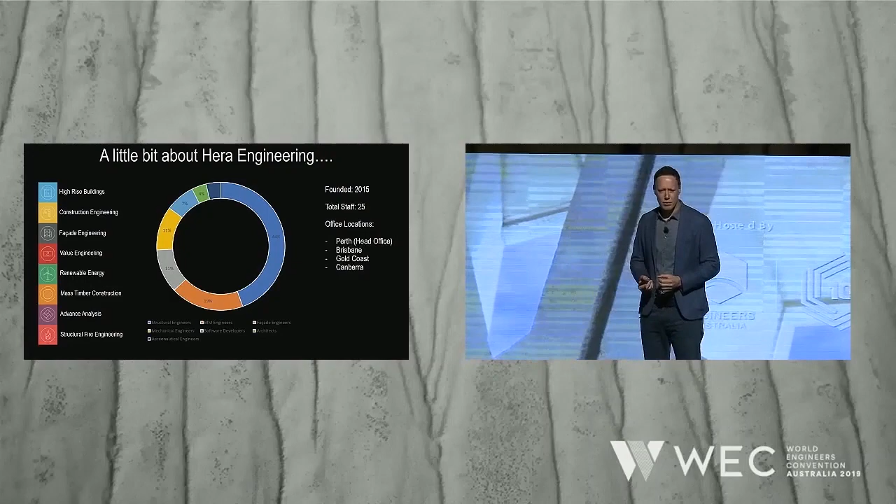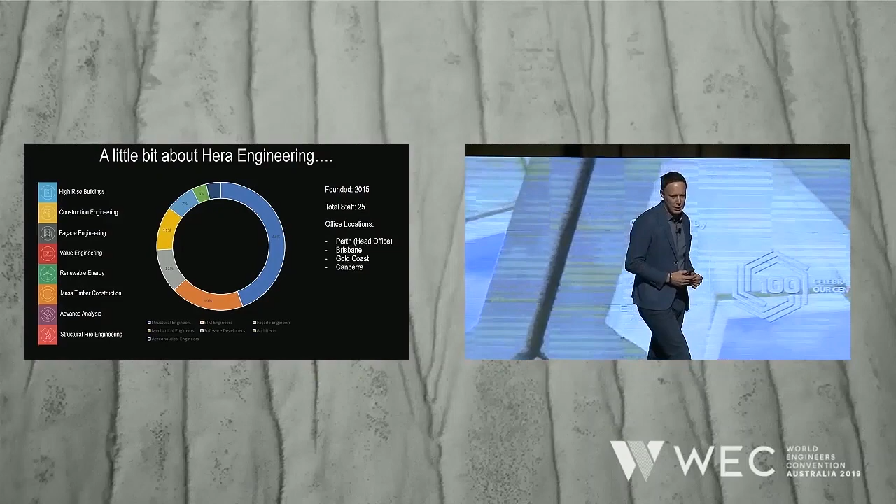Just a bit about us, for those who don't know, I'm a structural engineer and I run a company called Hera Engineering. We're based in Western Australia, around 25 staff. We do structural design, facade, and a lot of temporary work. So we work very closely with builders. High-rise is what we mostly specialize in. Some of our projects across Australia include towers in Perth, Canberra, and Gold Coast.

Now, what I want to talk about today is the challenge of tomorrow. We're going to be building cities and the population will grow. I like this sentence where they say: 19th century, century of empires; 20th century, century of national states; 21st century, century of cities. I think that's very true because our cities are growing in population. Every time I come back to Melbourne, I see more buildings.

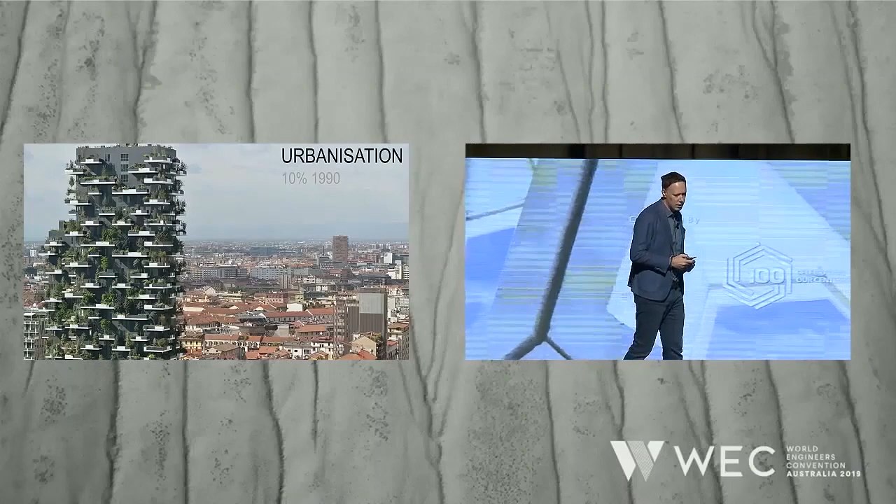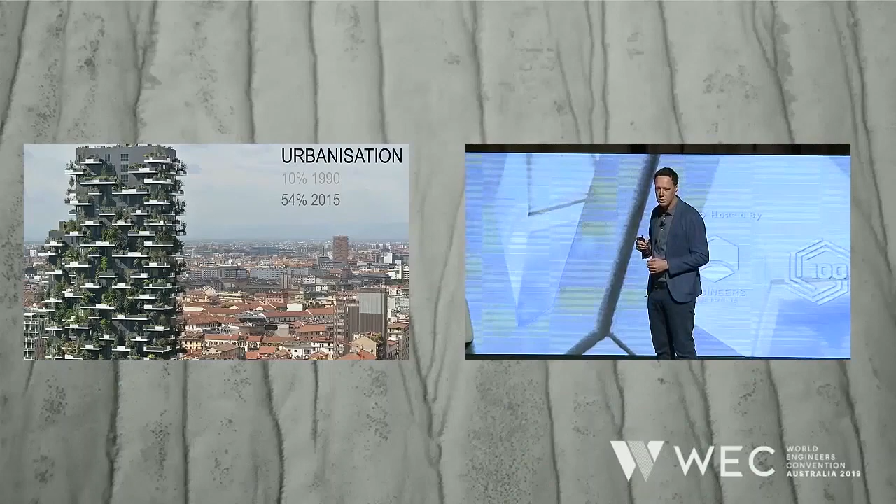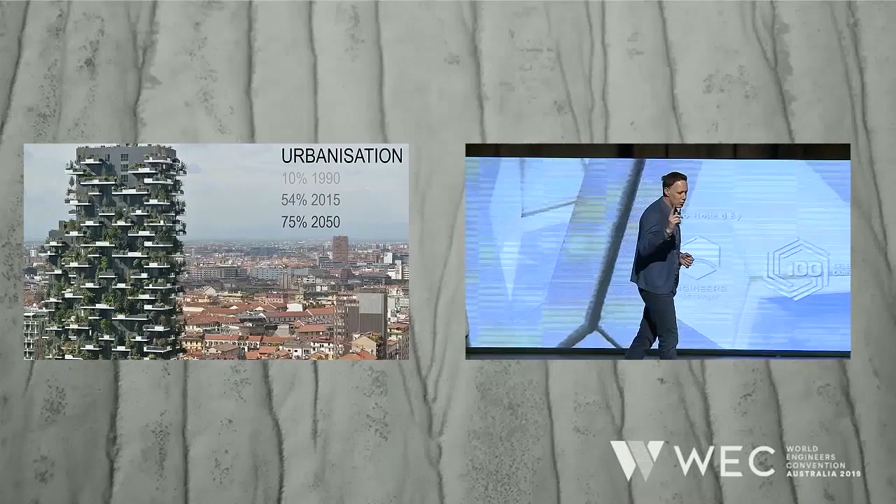It's interesting data on urbanization: 10% of the world population was living in cities in 1990 - I was only 10 at the time. That grew to 54% in 2015, more than half the world living in cities now. I grew up in a small village, so I only moved to a city in my 20s. By 2050, 75% of the world population will be in cities. That's the prediction, and I think it's true.

So we're facing a big challenge here. We have to find space in cities for 3 billion people in the next 30 years. So we've got a big world housing challenge - that's 40% of the world. 1 in 3 people that live in cities live in slums.

So the challenges for us as designers and engineers building cities: we have to bridge the gap of urban inequality, and address rapid urbanization - our cities have to have the right infrastructure and the right buildings to accommodate all these people coming to live in cities.

But to me, the biggest one is climate change. Our cities will be flooded with concrete, steel, and brickwork. If we keep building the way we are, we're just going to keep driving climate change up. 0.5% of the Earth's surface is urbanized, and 80% of the global economy output comes from cities. That's huge data showing that all our strength, our economy, our industry - everything is in cities.

So if we're going to keep building, we have to build sustainably. There's a big challenge out there because we're building mostly with 3 materials: brick, steel, and concrete. There's a 4th material out there, wood, and I'm a big supporter of wood. Wood is a material that sequesters carbon from the atmosphere. However, I don't think we can build houses and apartments for 3 billion people in wood, unfortunately. So we have to use these 3 materials wisely.

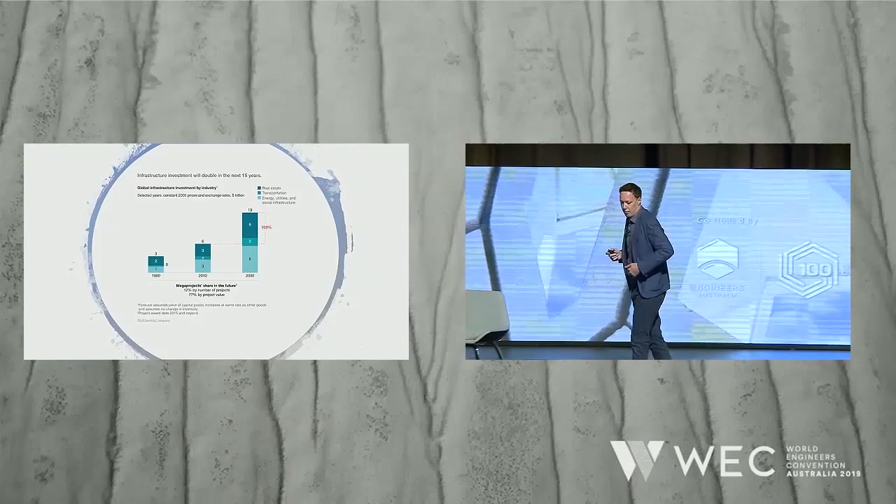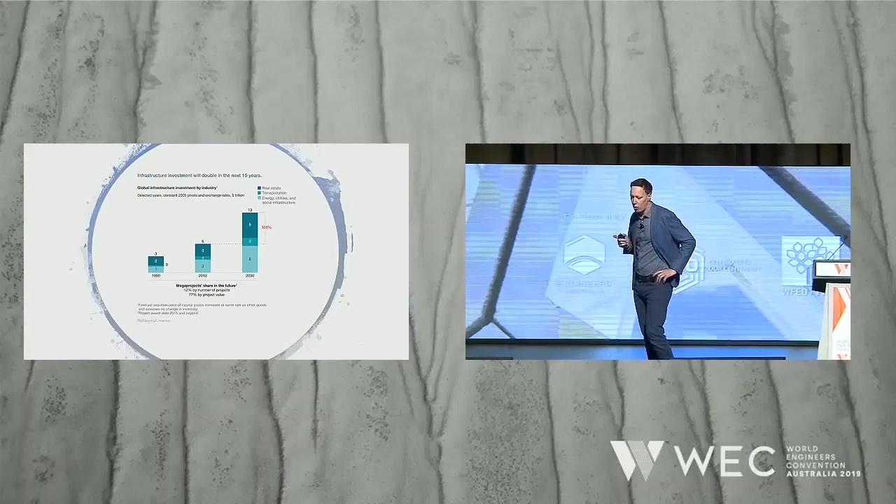This is research I was reading from McKinsey & Company, and I found it quite interesting because it shows that global infrastructure investment will double in the next 15 years. We're going to spend $13 trillion on oil and gas, mining, and bigger infrastructure projects.

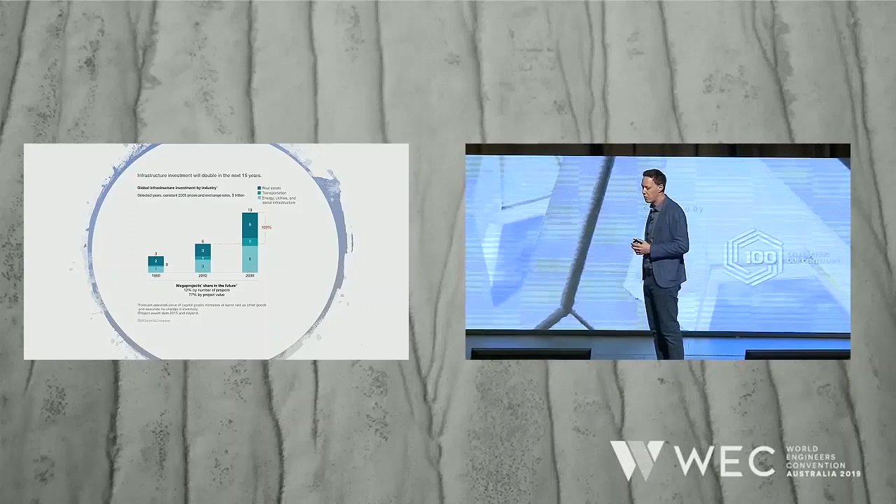Melbourne and Sydney are just flooded with infrastructure projects, which is great, so we're all going to be very busy designing and constructing. However, there is an issue with that.

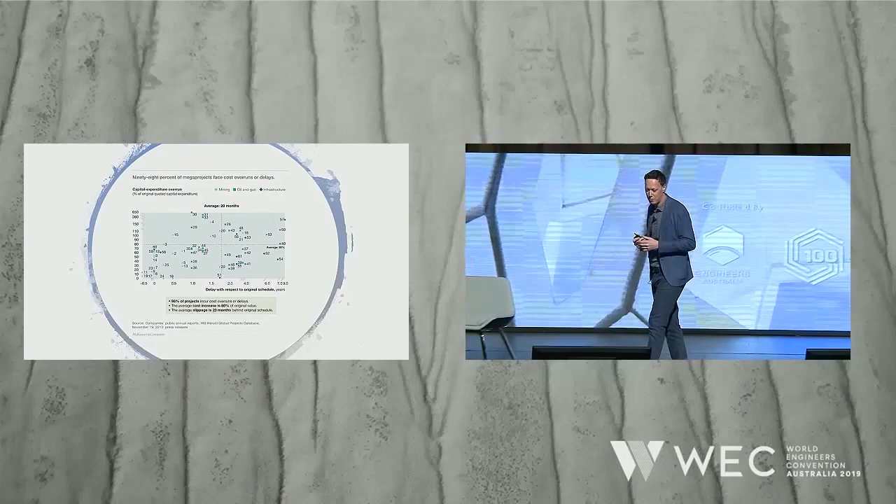98% of these projects are over budget and they are late. And the numbers are quite funny - they are over budget by 80% and they're late by about 20 months.

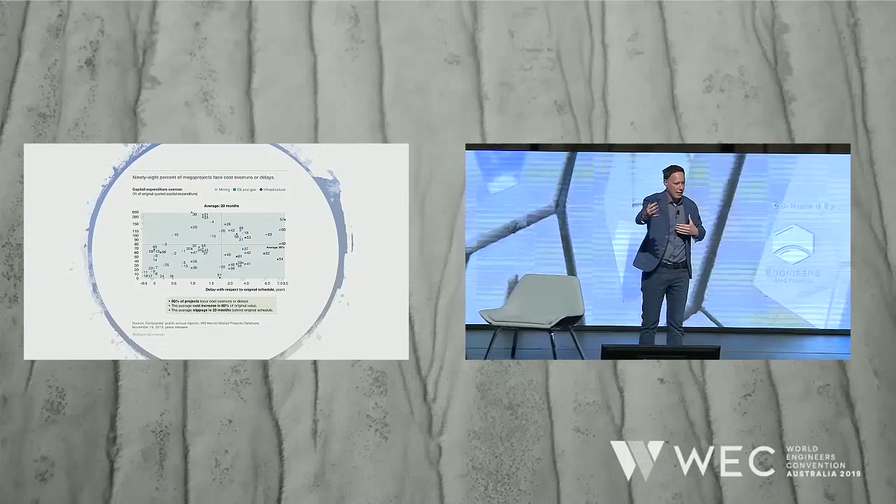So it's incredible, because a project being late and over budget means it's going to be even less sustainable, because you're going to keep building, you're going to keep going with the job.

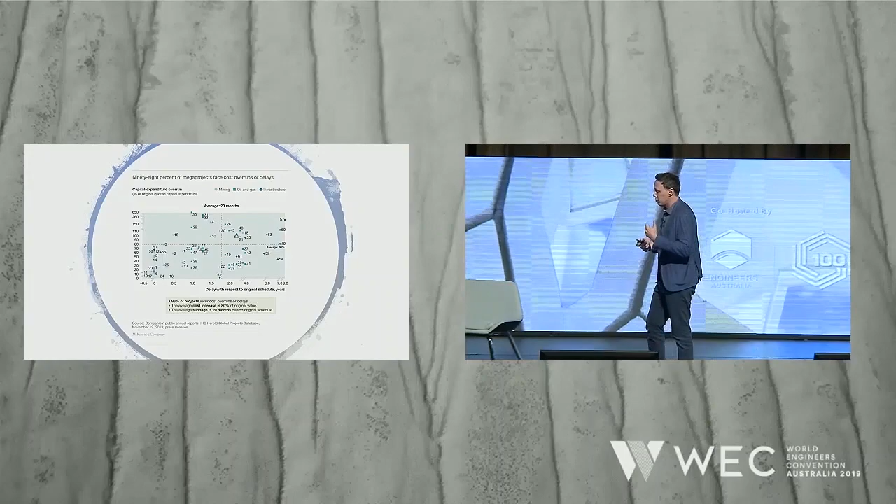So the research goes on to ask why that is. And they look at productivity and see there's a big gap between productivity in manufacturing and in construction. Construction has been flat, and actually got worse in the last few years.

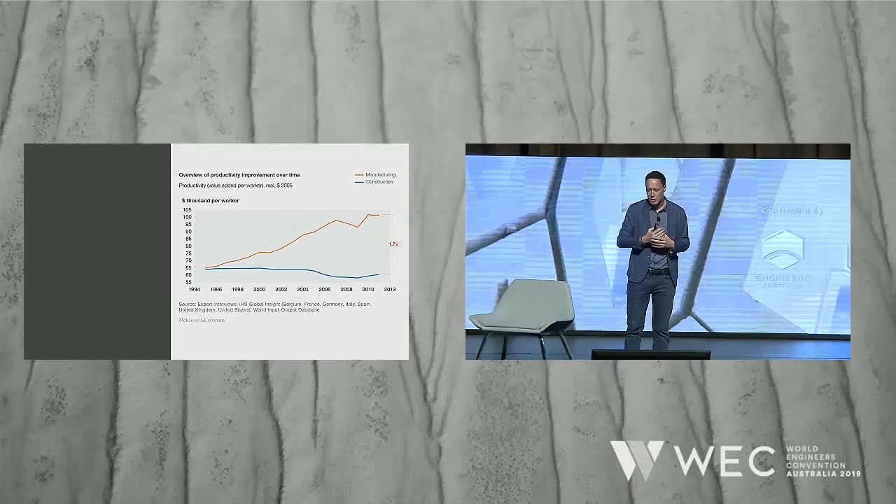Whereas the manufacturing industry went up - there's a 1.7x difference - and it's because the manufacturing industry is fully automated, so there is less human touch put into it.

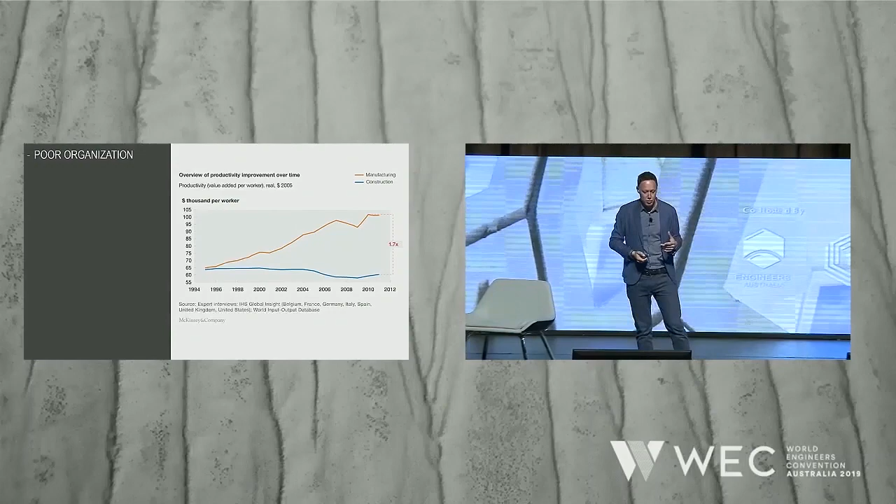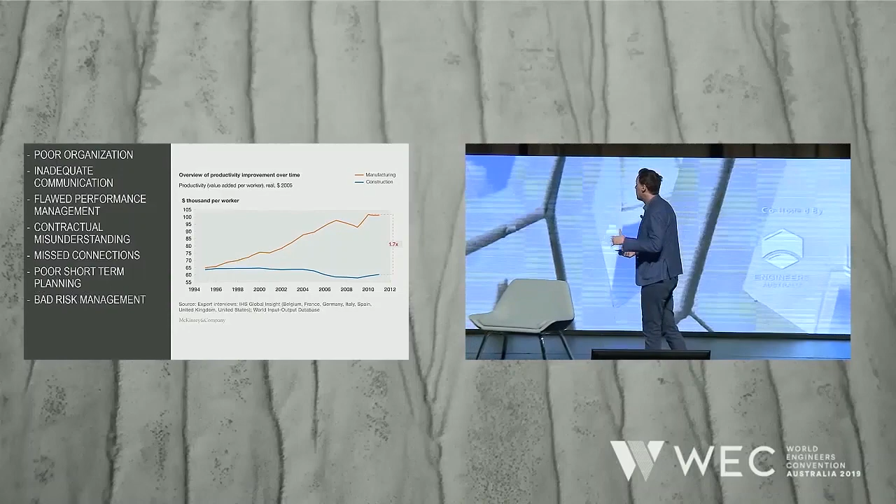And so when there's human involvement, there are a lot of problems that could arise: poor organization, inadequate communication, flawed performance management, contract misunderstanding and misconnection, poor short-term planning, bad risk management, limited telemetry, and you can keep going with this list.

So it's all on us to be able to communicate better and to try to work with our clients and the supply chain in a different way.

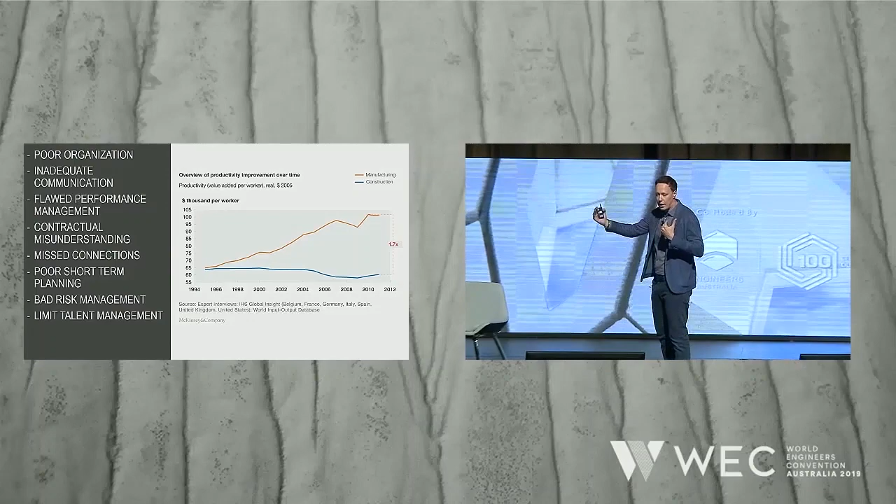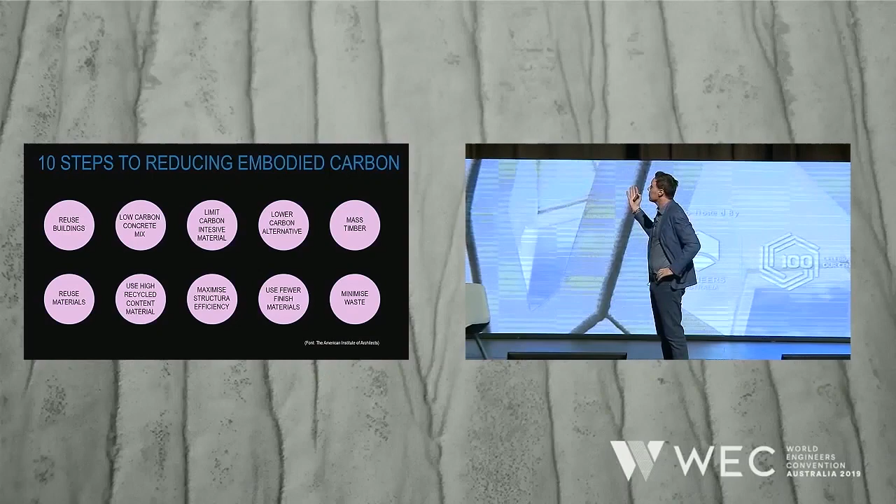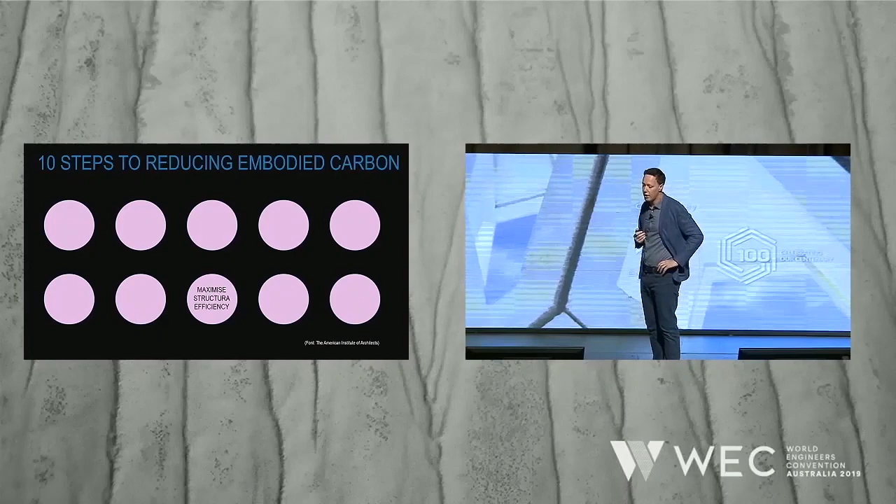This is from the American Institute of Architects. They give us steps to try to produce buildings with less embodied energy. And for me, what I can really talk about is maximizing structural efficiency.

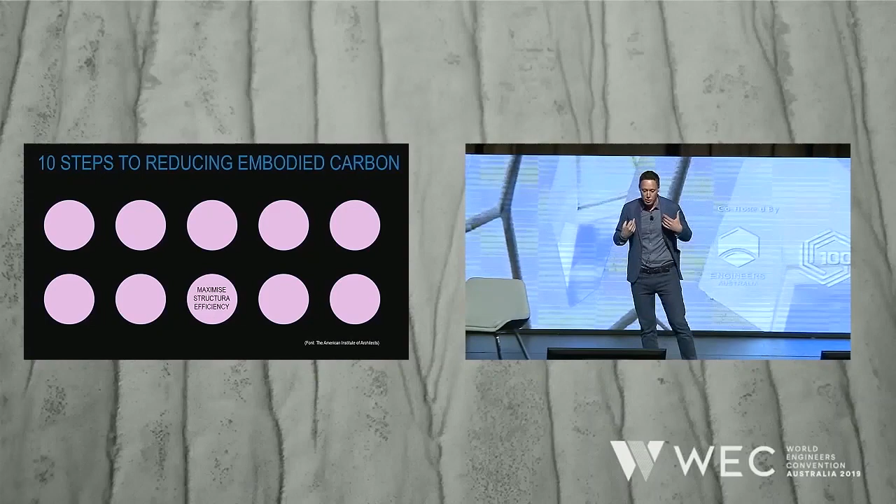This is a common goal that we need to achieve. So as a structural engineer, I have to achieve the maximum structural efficiency that we can to reduce material use in projects.

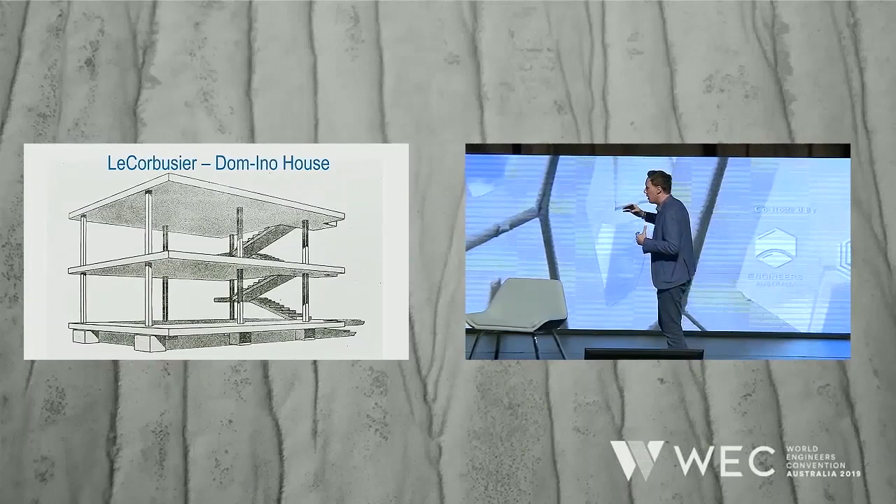So Le Corbusier, in 1914, came up with the concept of the Domino house - this is 100 years ago. The Domino house was thought of after the war, where we had to reconstruct our cities in Europe, to create something that is modular. This was his view: to construct a new home for all the people that lost their house after the war. So it was going to be a modular system - reinforced concrete, 6 columns, 2 slabs, stairs - and then you clad it, and then you fit it out as you want.

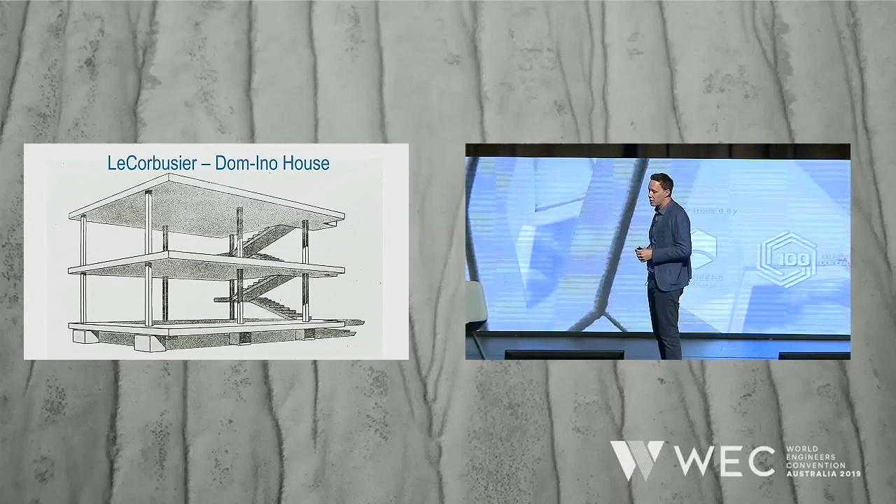And I think this is the basis of a lot of the concepts we're still speaking about today: modularization, standardization, trying to achieve repetition in our construction.

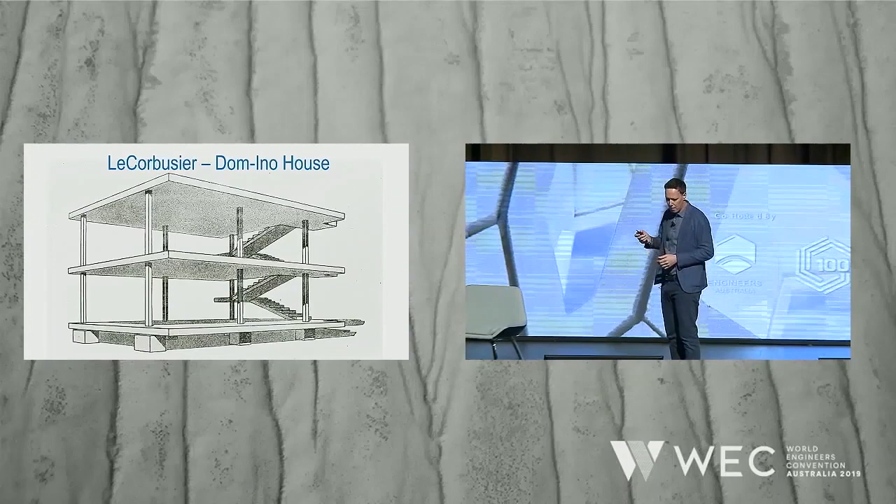And how this project came about is the builder came to see us, and he wanted to save cost on the job because the job was over budget, and he wanted to try to find a different way to do it.

So it was already advanced in the design. There was already a design done, which was a fine design, there was no problem with that. The problem was there were a lot of subcontractors and suppliers, different construction methodology. It was quite intense to build.

So the idea that we had was to remove all the subcontractors from the majority of the concrete, the precast, the AFS, the post-tension, and just stick to structural steel throughout, including the core, columns, slabs, everything. The biggest innovation on this project was it was already conceived with top-down construction, and that was what we left on the job, and we just improved the use of the steel column.

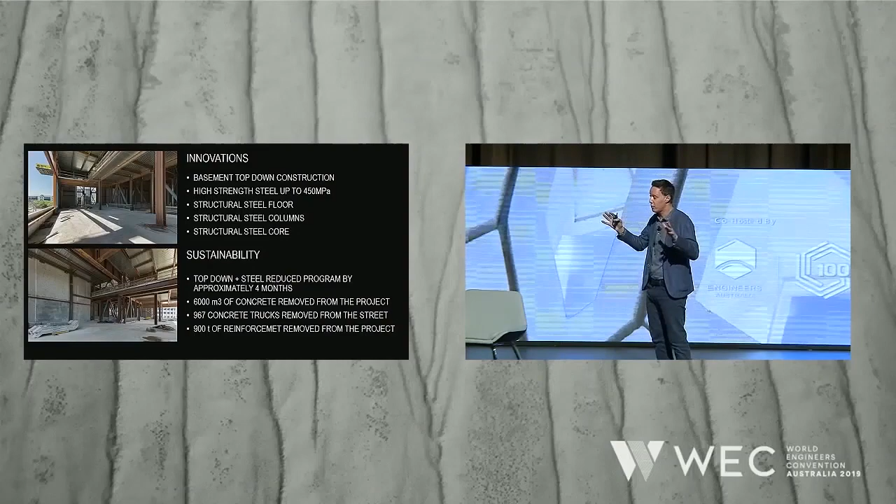We use high-strength steel to reduce the size of the column and reduce the amount of steel on the project. All the floors for both the hotel and the office were changed to steel. All steel column, steel core, which was the biggest innovation. Normally lift cores are built all in concrete, whereas in this project we use structural steel. You can see all the bracing over there.

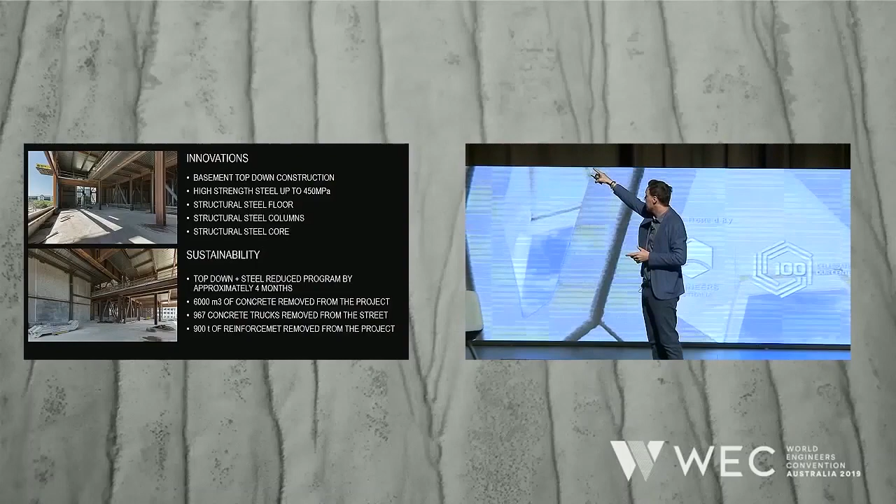So that was, I guess, one of the first times this was done in Australia. It's very common in Europe, but people were very skeptical at the time about it.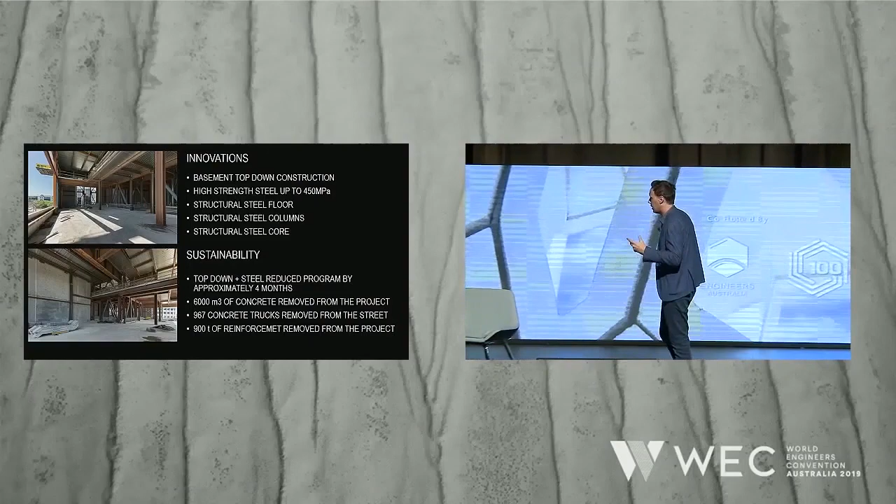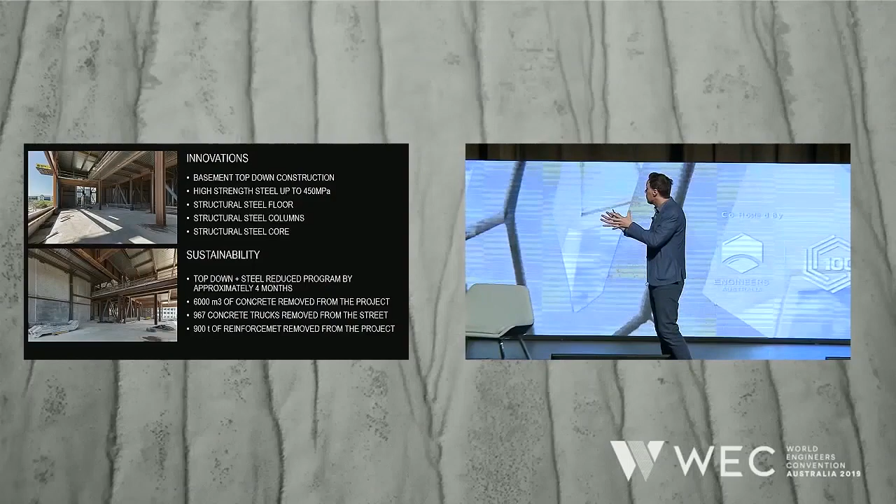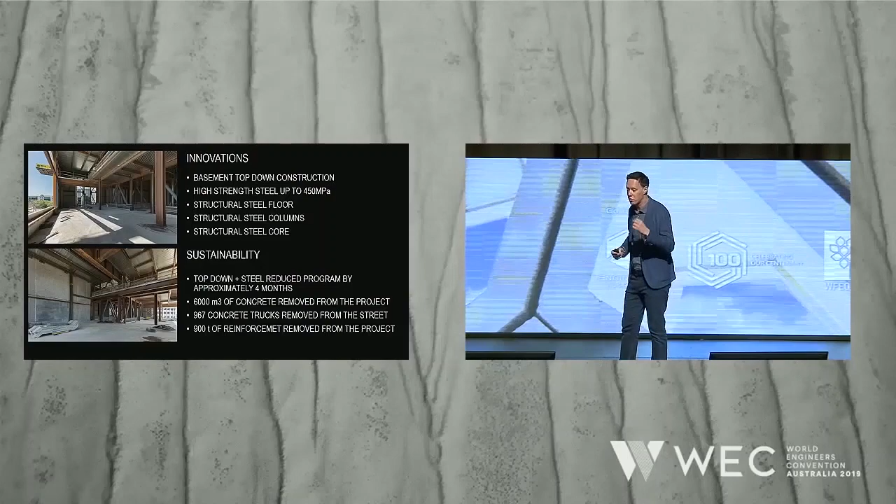Now the sustainability of the project - because we're talking about steel, it's still a material that has embodied energy, but it depends how much you use it and how you use it. So here, by using structural steel, we removed around 6,000 cubic meters of concrete from the project, and almost 1,000 concrete trucks were removed from the street because the slab became very thin compared to how big they were before. So yes, we have to put a steel beam on it, but there has still been an improvement on the embodied energy of the building.

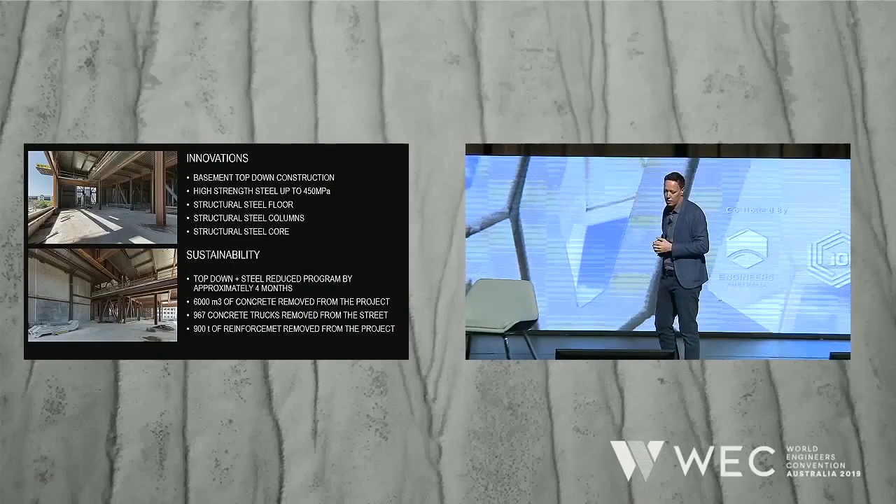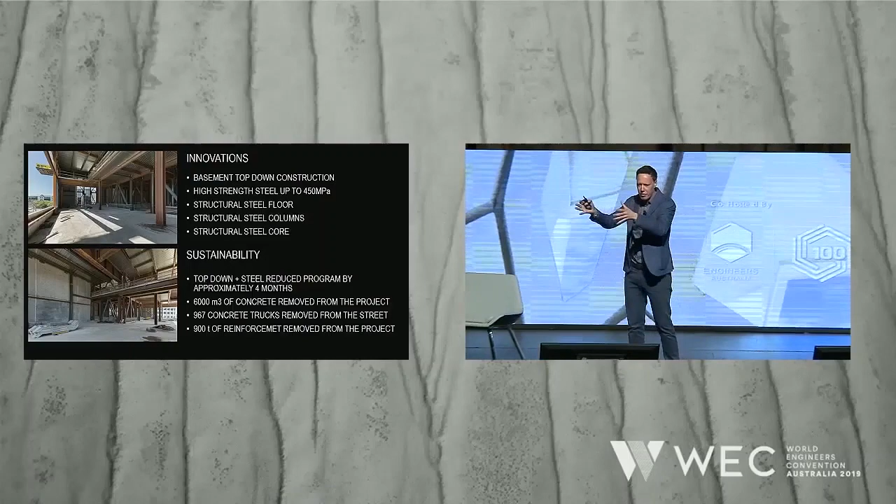And we have removed 900 tons of reinforcement from the job. This is all material that can be used in another development, and you get it for free, because you optimize the design of this building.

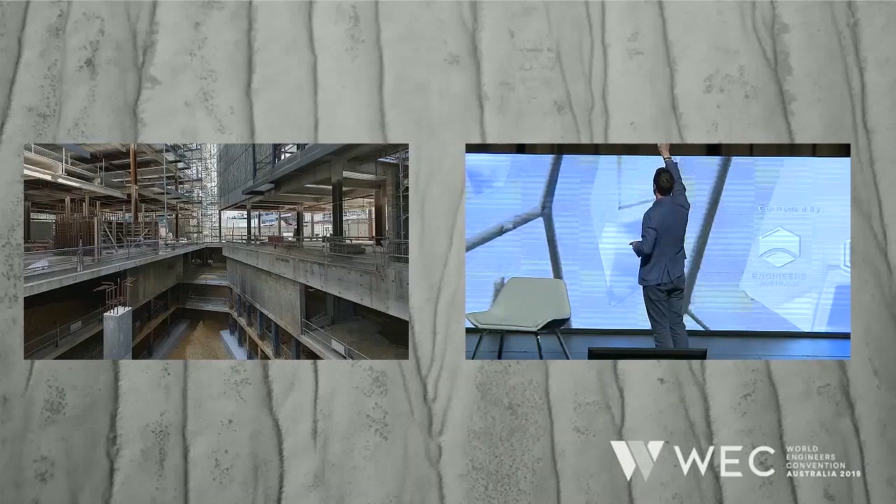Some of the other photos, you can see all the excavation, all the top-down construction, so it was built up and down at the same time. That's all the steel plunge columns going in, and then you can see all the structural steel on the project here. In another slide, you can see all the main core fully braced up.

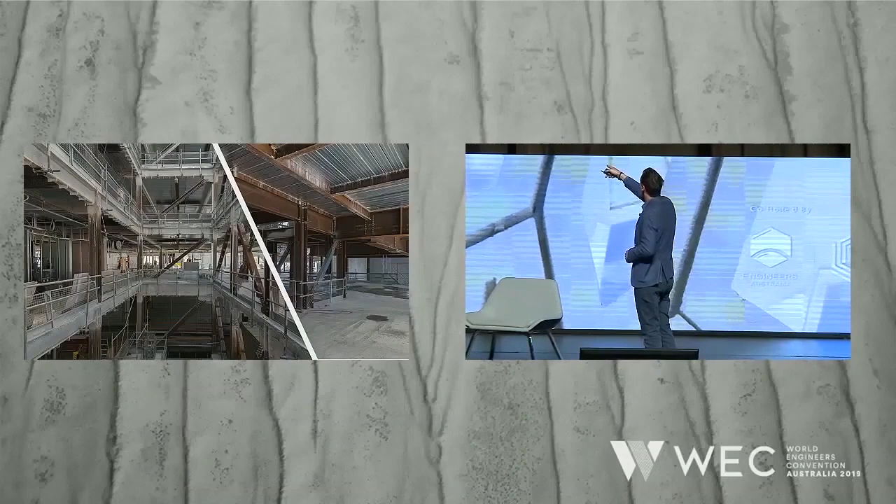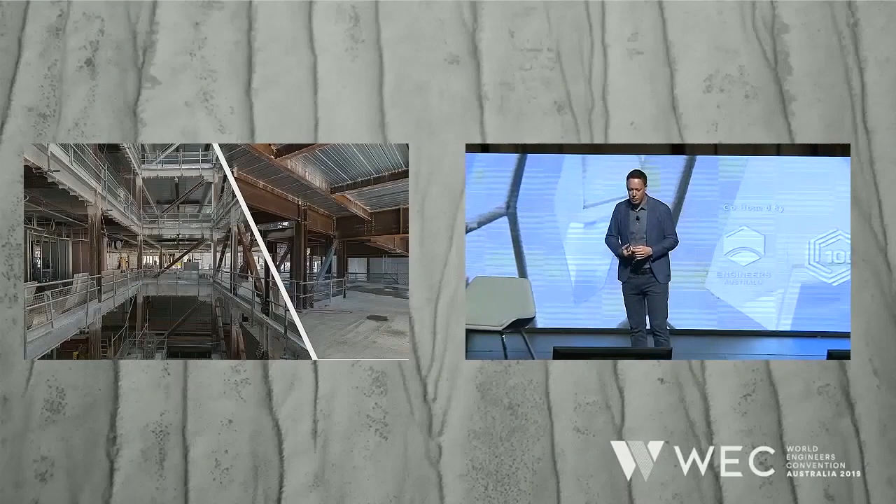So again, it was pretty strange to see - no one had seen it done in Western Australia before. So obviously there was a lot of skepticism out there, but it works - it's done everywhere else in the world. That's the hotel component during construction while the facade was going up.

We came to the project during the tender phase when there was a need to save cost on the project. So our value engineering approach was about, okay, we need to make it quicker to build, and we need to reduce material on it.

So we just started to relook at how the building was behaving, how it was performing, because in high rise, what matters is how much the building is moving at the top. So provided that you can get the building to move the right amount, that's all you want. So we removed a lot of the shear walls, and we introduced a big steel mega truss at the top, just to stop that movement. And that made the project work.

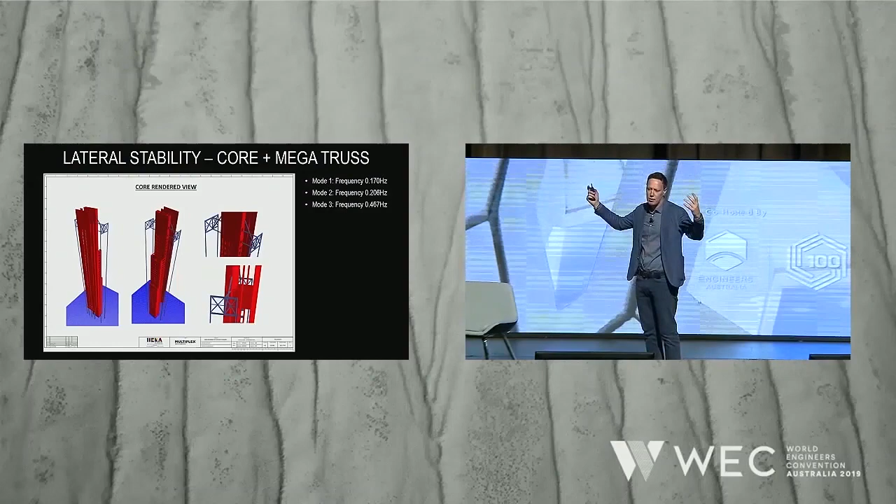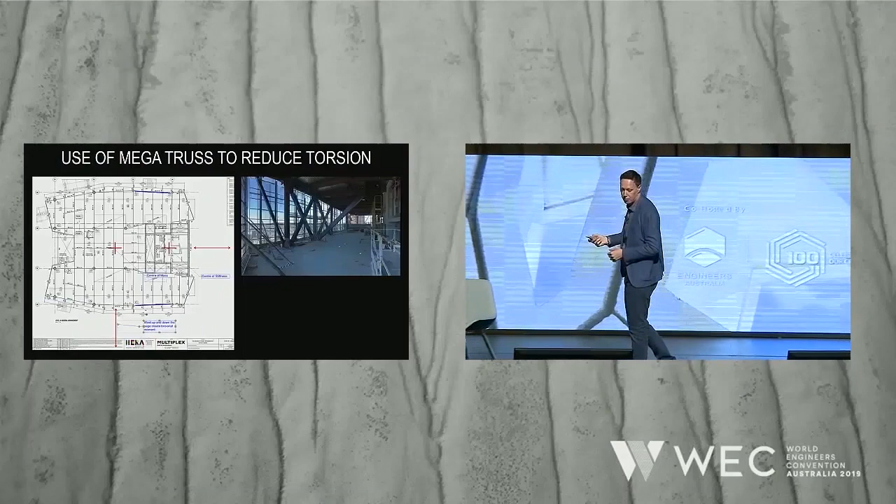And again, this is just an idea. An idea an engineer must have, an idea that you have to put into action when you're designing. That's the mega truss over there when it was constructed, and it's to reduce the torsion on the tower on the top floor. Everything was done in BIM.

It's very important to work with the steel fabricator, the steel supplier, and the shop drawer to create that tower on paper first. That is a huge advantage because when you're building in steel, you have way less people on site, way less congestion. There's only 3 or 4 guys installing the beams. That's it, that's all you have. You don't have like 60 people putting formwork, reinforcement, etc.

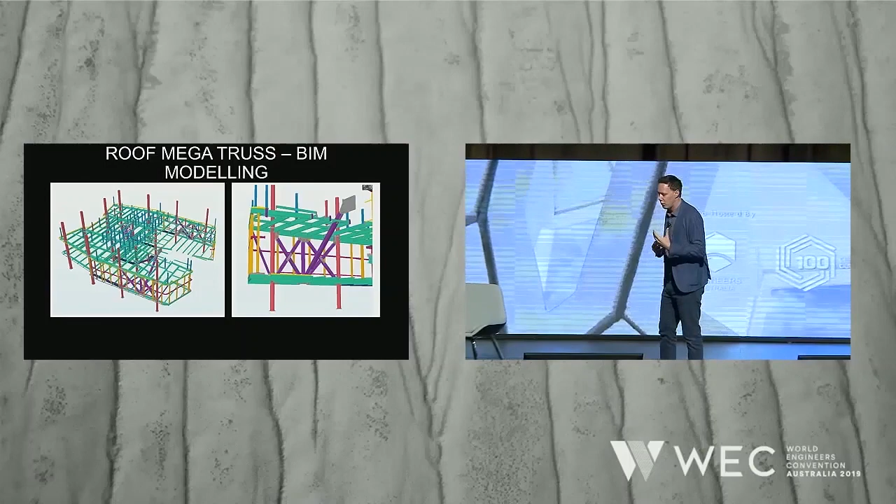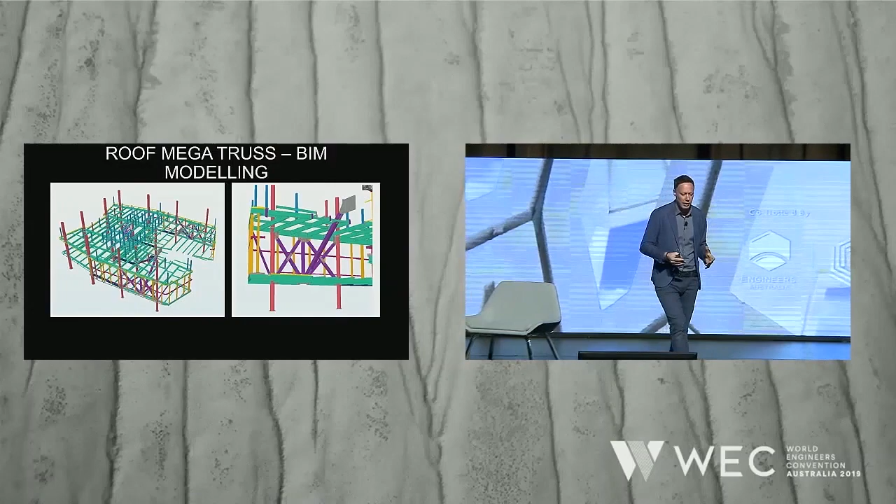It's a much cleaner site, and for safety it's really, really good. Everything is pre-done before you go to site. It's like when you buy an IKEA flat box, you just need the instruction to put it together. That's how it is to build a steel tower.

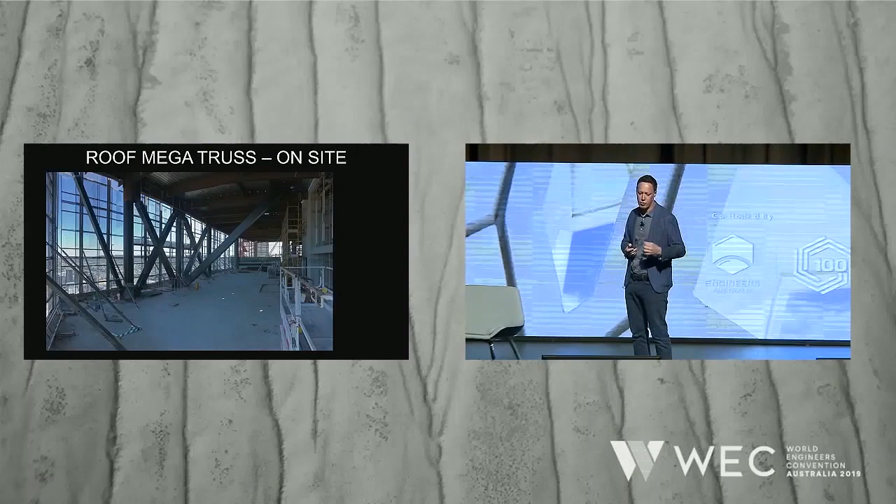That's some of the photos of the mega truss when it was constructed on site, and this has been the big innovation on this project. Some of the connections are very, very heavy because imagine the wind loading at the top. It needs to be stopped.

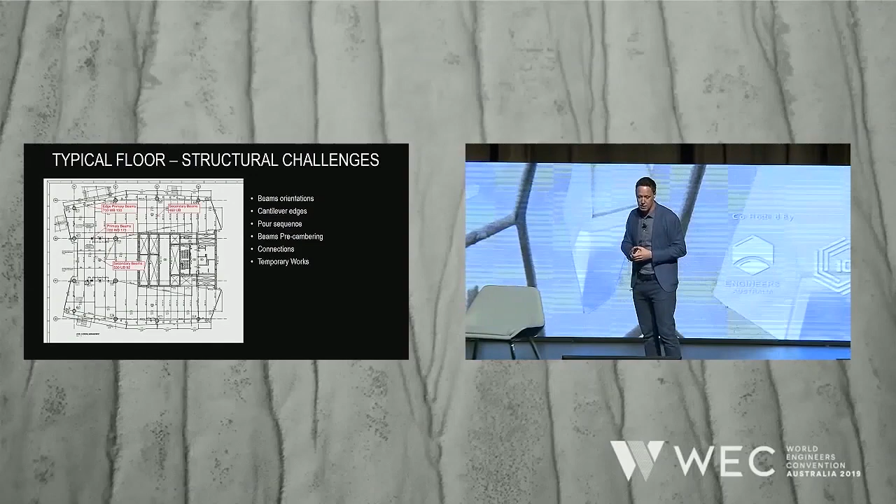All the floor is structural steel, so it's quite simple to install, and as I said, there is no propping. It's quite quick - there's some of the photographs. You can see how clean the site is. There's no formwork. If you look at that second photograph, underneath the deck is free, so you can start already working. That's why it's so quick to build.

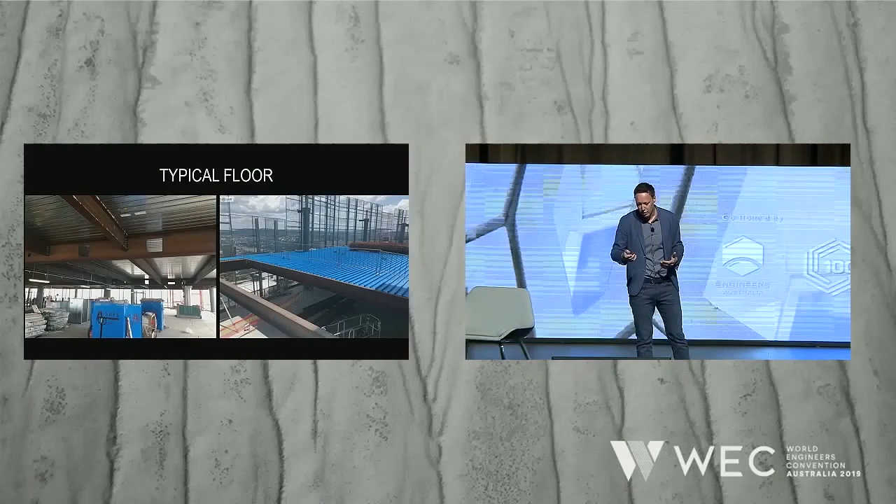Columns as well were 3-story steel columns. And all the steel has been coming from Australia, which has been another big sustainable aspect, so you don't have to truck and ship the steel from overseas.

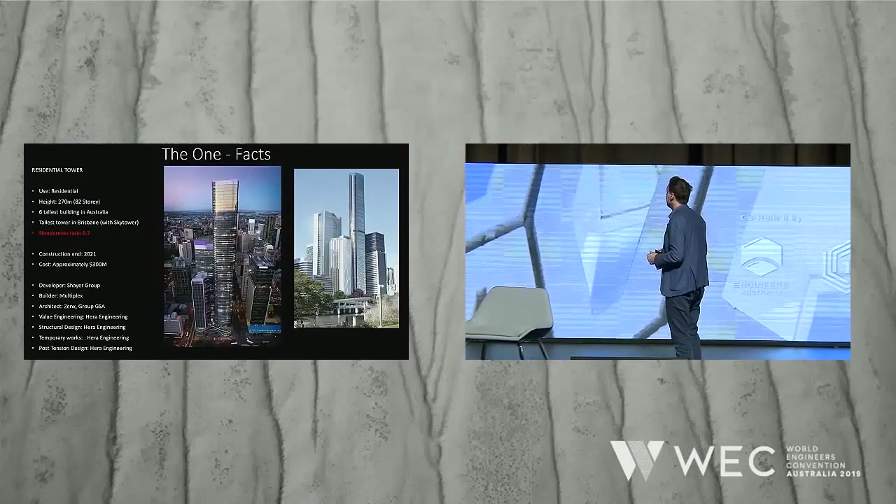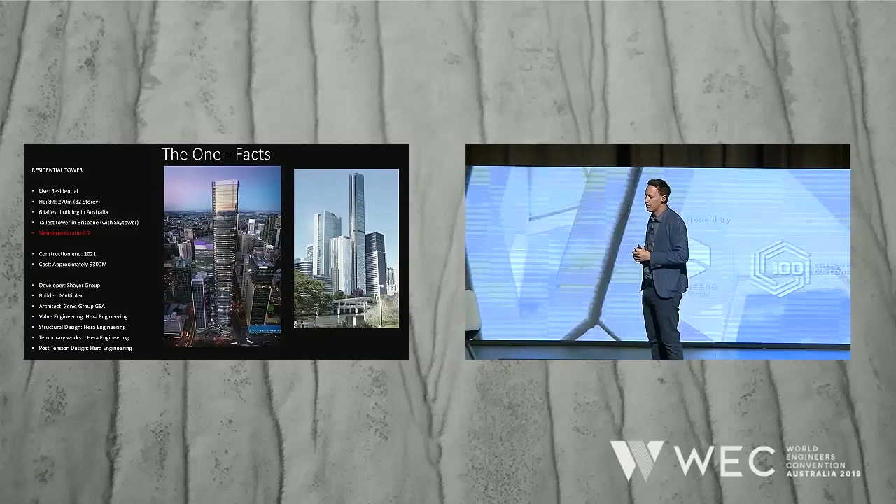On the same development, there is a residential tower - this is a rendering because it's not been completed yet. It's 82 stories, it will be the 6th tallest building in Australia. It will be the highest building in Brisbane, with the Sky Tower. It has a slenderness ratio of 10, which for a high rise is very high, and it's quite interesting to design.

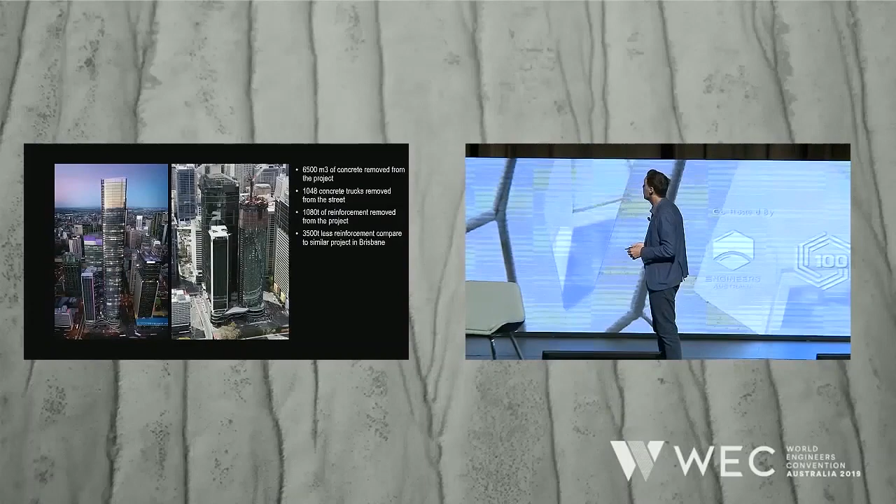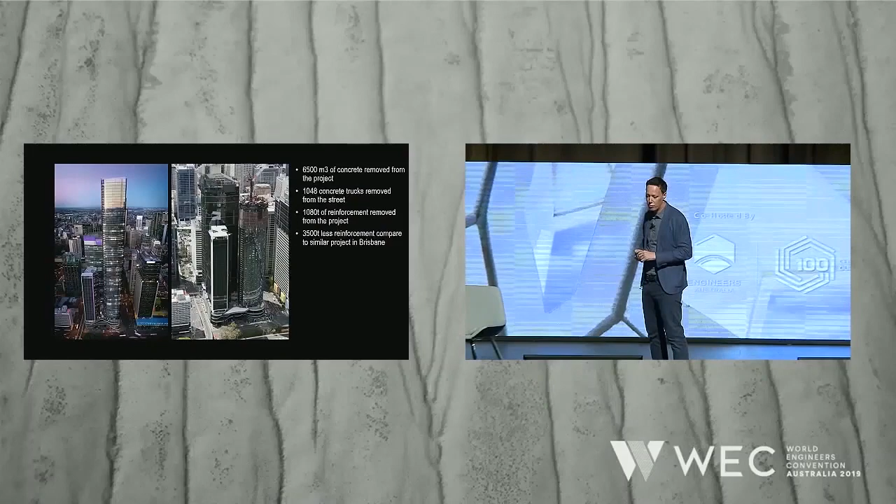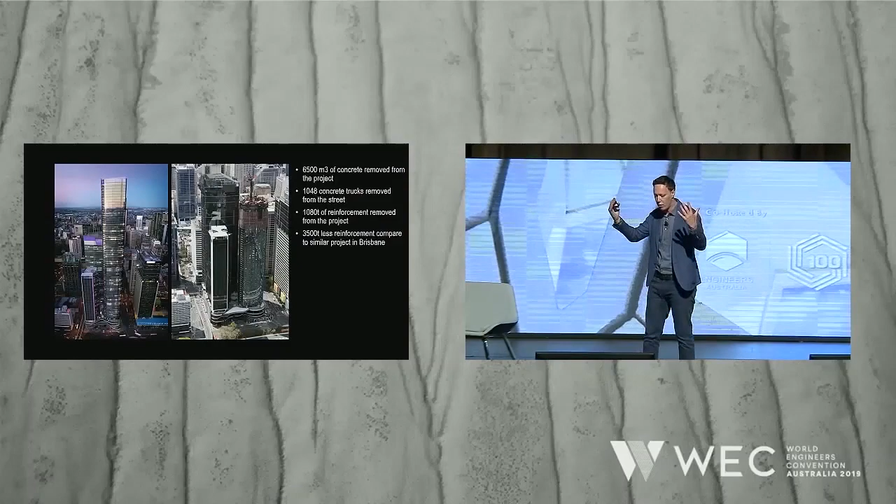Same building, multiplex. That's some of the photos from current on site, and that's the office tower at the back, complete. Again, our engineering approach removed 6,500 cubic meters of concrete. We got more than 1,000 trucks removed from the street, more than 1,000 tons of reinforcement. And what's more interesting is there's a very similar building in Brisbane, different builders but the same subcontractor building, and our building has like 3,500 tons less reinforcement compared to the other tower.

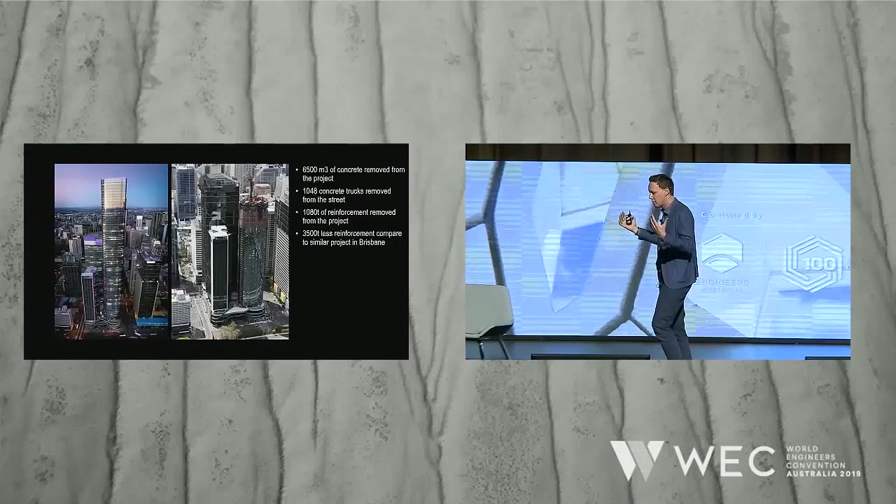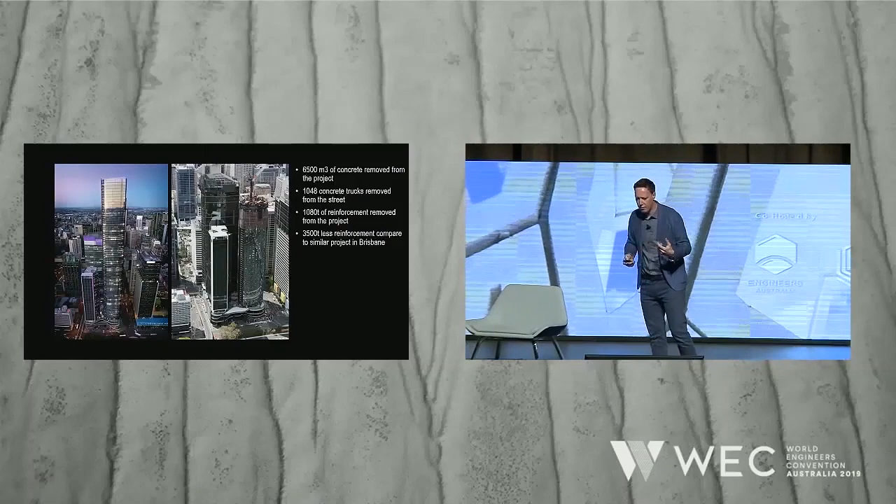And still comply with the code. Why is that? Because the other building has just too much concrete, too much steel, and this is how we're building at the moment. So there's a big need for value engineering, because if we can save all this concrete and all this steel, we can build for free other accommodation.

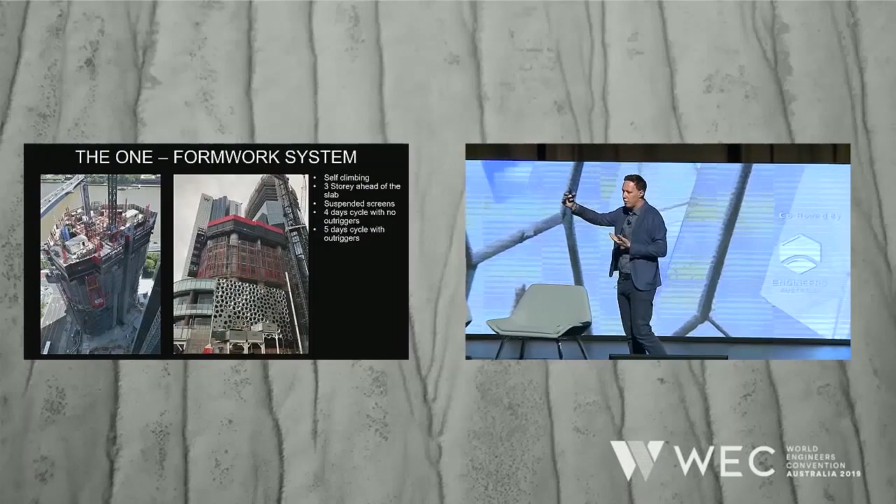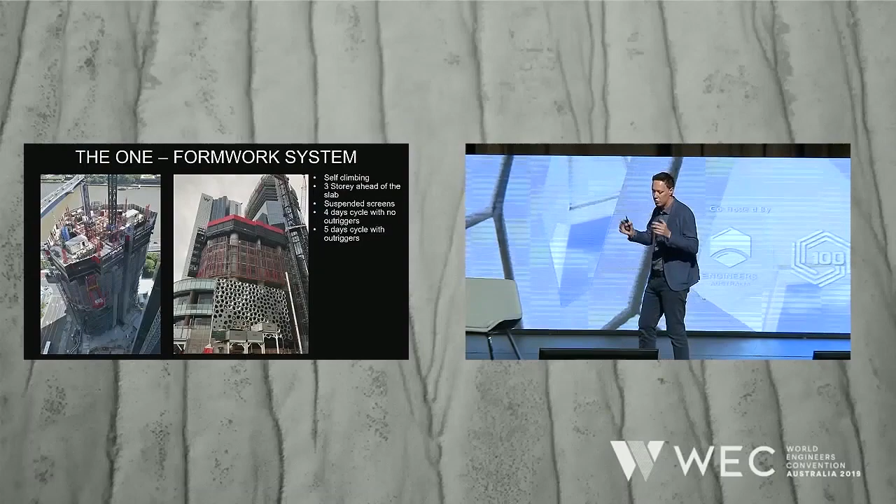One of the biggest innovations on this job has been the self-climbing formwork, and that is getting to the future, getting this automation. This formwork system is very expensive to buy, but when you have the big towers, you install it once, and then this formwork system climbs every 4 days - climbs a level, and we're building a level every 4 days, which is unbelievable.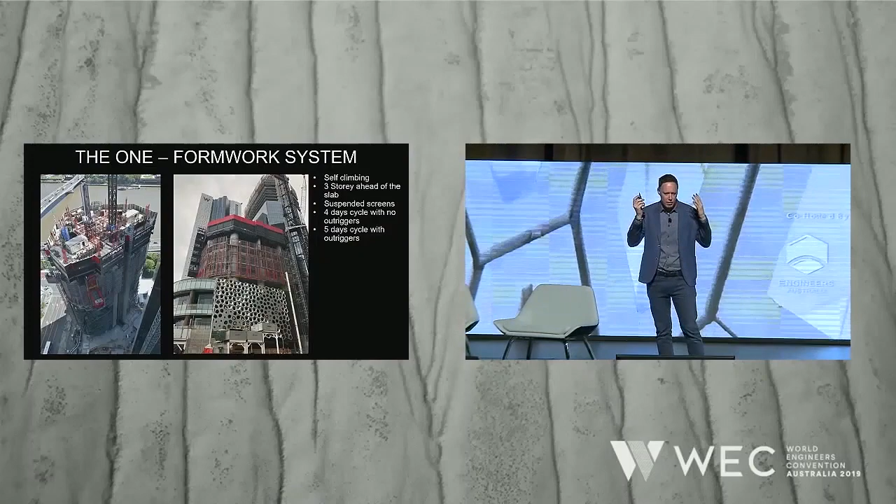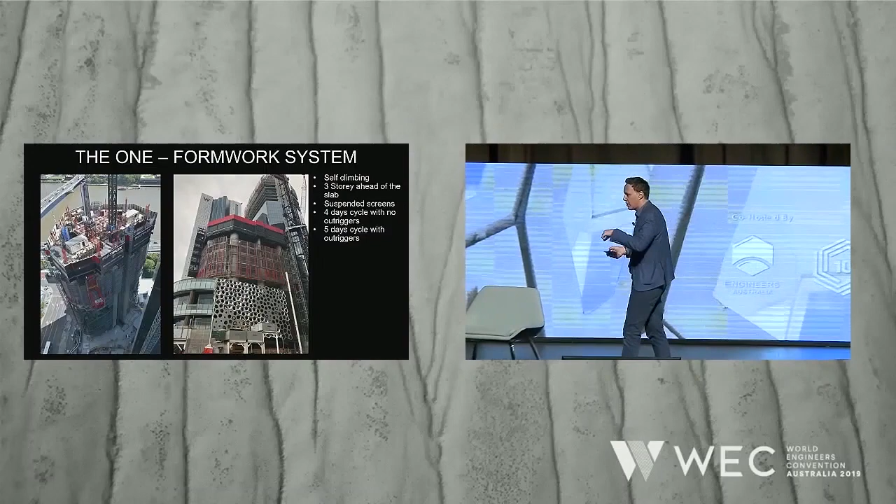So that's how you reduce time and project. But to do this, you need to be able to design to achieve the floor cycle. The engineer has to work very closely with everyone, form workers, suppliers and builders to achieve that, because designing paper is one thing, how it's getting built on site is a different one. So you need to know the nuts and bolts of how the system works in order to be able to deliver.

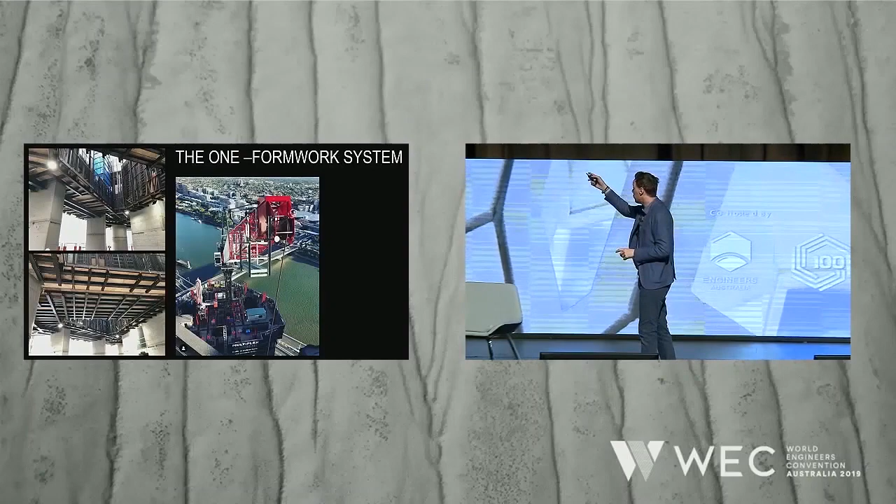There's some photographs of the system that is climbed. It's 3 stories ahead of the last slabs, and that's just a photo from the office tower when they were installing the steel roof. That's again some of the photographs.

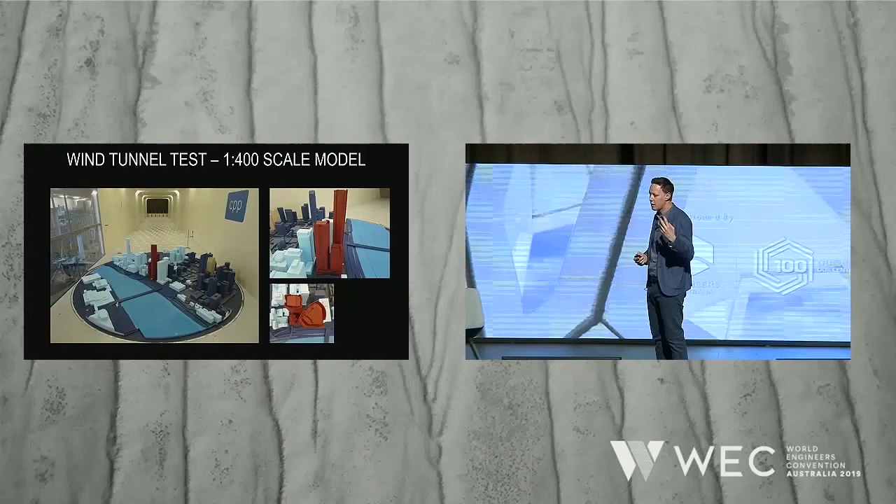Wind tunneling is very important, and very important to do wind study in a building to get the comfort and to get the right amount of load on your building, so you avoid over-designing. So we're using wind tunneling for tall towers, and we have to keep doing that. It's also going to give you a realistic view of how much wind is going to hit your building.

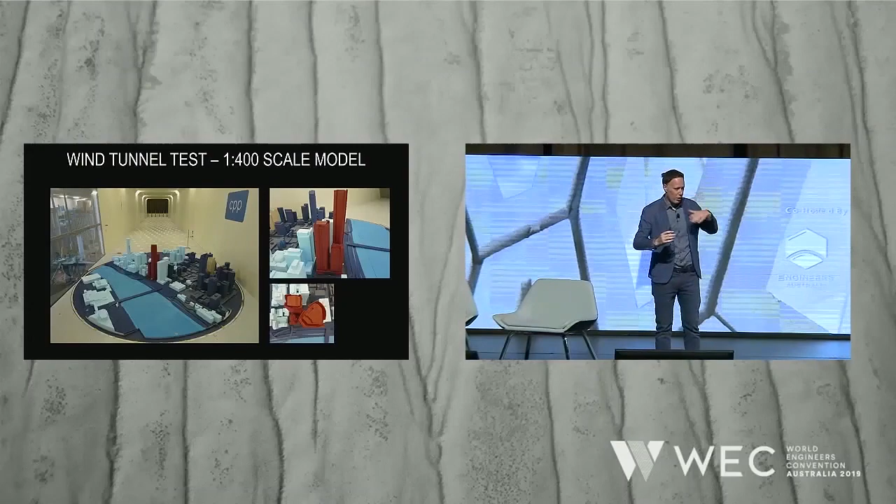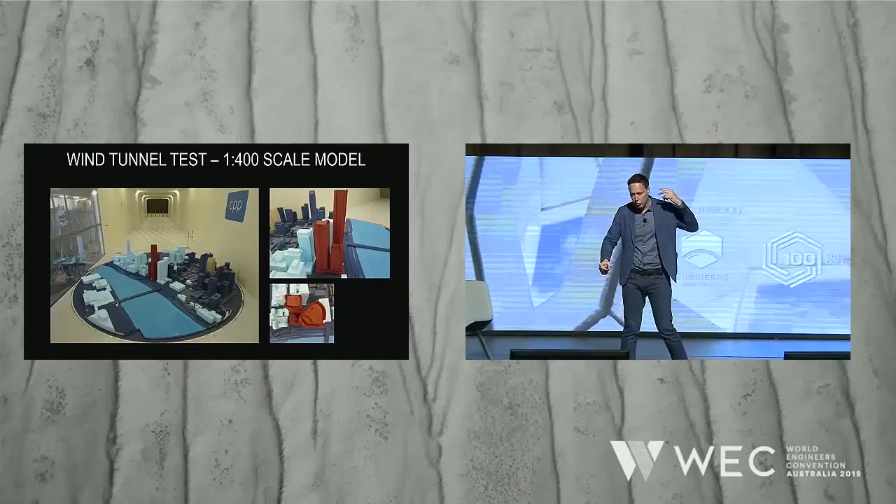On the commercial tower at 300 George, we did wind tunneling on the roof, just to design the crown of the roof, which is 200 meters up in the air. If we would have used the code, we would have needed 200 tons of steel. Because we did local wind tunneling, the cost was not high. We went from 200 tons to 120 tons. We saved 80 tons of steel just because we did wind tunneling.

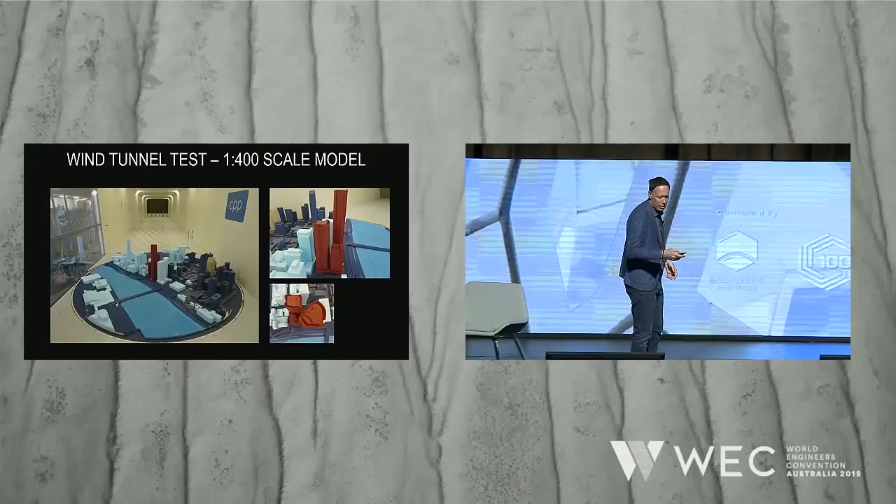That's incredible, because those 80 tons, once again, they would have been in that tower, whereas we can use them to build a school, for example.

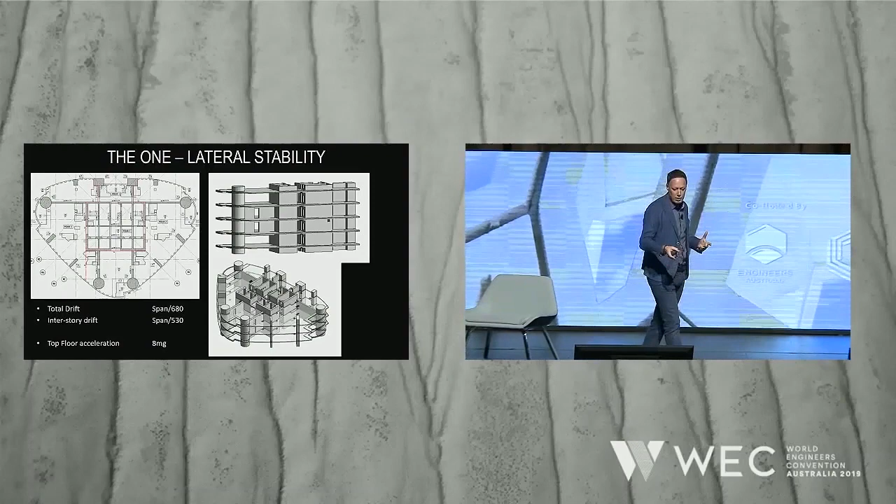That's some of the images from the tower. It shows all these big columns on the perimeter that stop the building from swaying. It's like when you go skiing, and you have the sticks to balance the movement of the building. They call them mega columns, and the concrete wall connecting them, they call an outrigger.

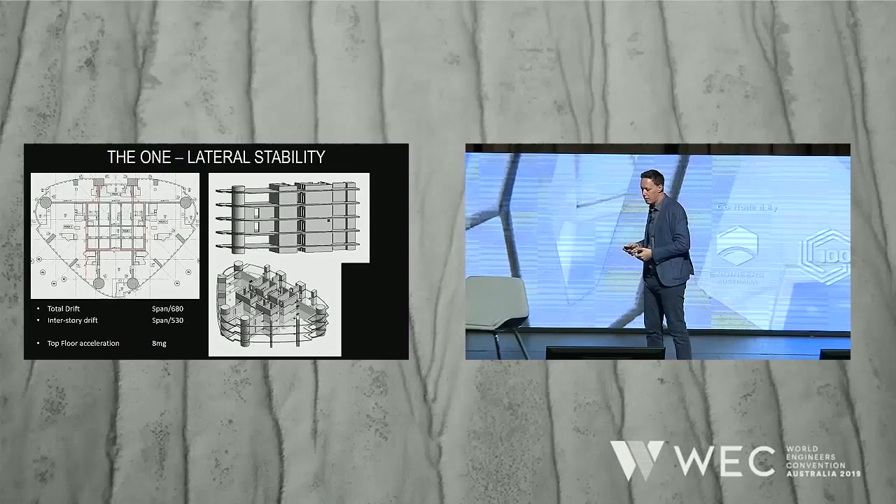This concrete wall used to go all the way up, whereas we stopped the wall and we just have the wall in 4 different spots. So that's where the majority of the concrete was saved. That's some of the photographs of how this building is standing up against the wind loading.

Now, to conclude, for me as a structural engineer, I think if we build in the city, we're gonna build tall. That's the way the future is gonna go. Even in Milan, in Italy, where I'm from, there didn't used to be many high-rises over there. I just went to the city 2 years ago. There's a lot now, because people are moving to the city. It's obvious now, so we're gonna build up.

We can't build flat, so high-rise, we need to understand how to do it. I think there's still a lack of understanding of how this is done.

And use the right material. Steel, concrete needs to be used wisely. You need to keep things simple. Architect and engineer need to work together to get columns straight, avoid transfers. That is gonna really shorten your time, because as soon as you complicate the building, it's gonna take more, and then it's gonna go over budget, I guarantee you.

Speed of construction, just an example to show you on 300 George, that formwork system reduced the cycle from 7 days to 4 days. That's 6 months in the program. We saved $20 million in those 2 projects because of the program that was saved and the material that was removed.

Use advanced techniques for design, analysis techniques, software, and we need more advanced codes. The codes are very conservative at the moment. We need more advanced codes.

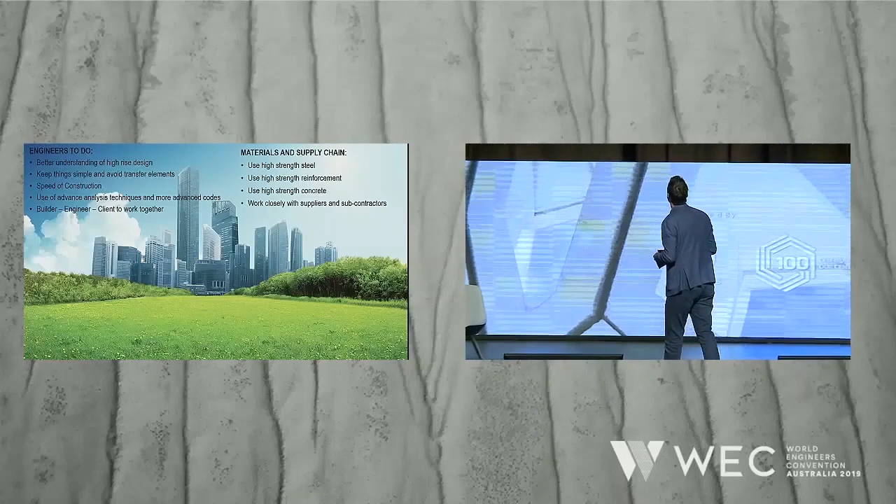And for the material and supply chain, we have to specify more high-strength steel, because it's just less steel, just stronger, so you need less. And we need to use high-strength reinforcement, just came out, and high-strength concrete, and again, work closely with subcontractors and the supply chain. Thank you.